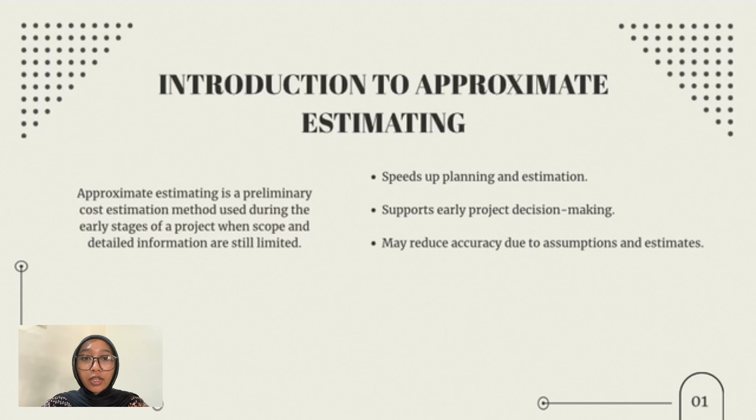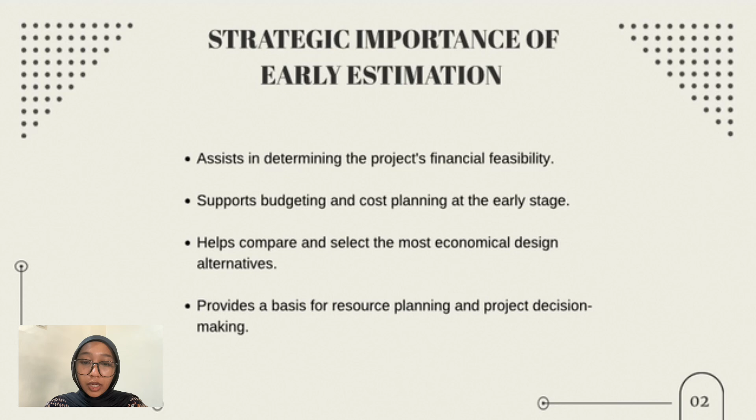So now I will move to the primary methods of approximate estimating. We have 4 methods that can be used. First is floor area method, where the cost is total floor area times cost per meter square. Second is cubic method, where cost equals building volume times cost per meter cube. Third is storey enclosure method, where cost equals enclosure area times weighted cost rate. And lastly, unit method, where cost equals number of units times cost per unit.

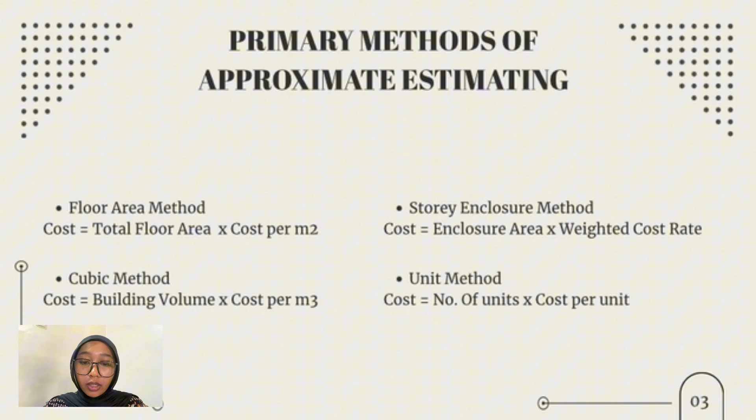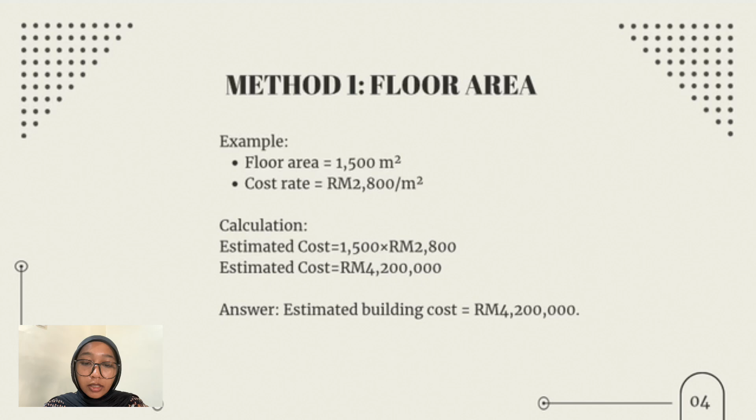Method 1 is floor area, where in the example the floor area is 1,500 meter square and the cost rate is 2,800 ringgit per meter square. So for the calculation, estimated cost equals 1,500 times 2,800 ringgit. And the estimated cost would be 4,200,000 ringgit. That is the answer for the estimated building cost from the floor area method.

So, the second method is cubic. For the example, the length is 20 meter, the width is 15 meter, the height is 12 meter, and the cost rate is 900 ringgit per meter cube. Step 1, calculate building volume. Volume equals 20 times 15 times 12 equals 3,600 meter cube. Step 2, calculate estimated cost. Estimated cost equals 3,600 times 900 ringgit. So the final answer for the estimated building cost is 3,240,000 ringgit.

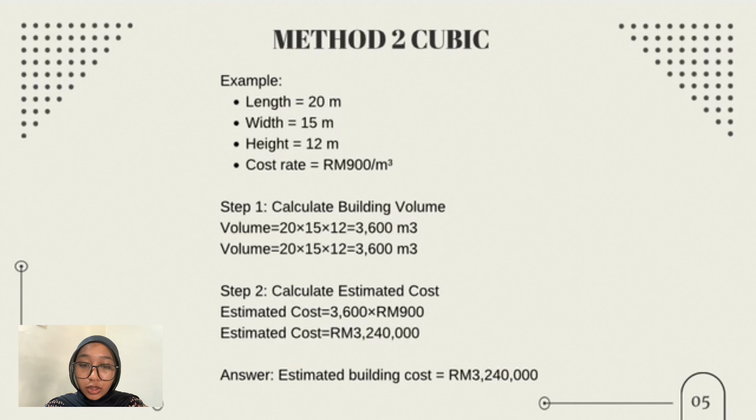The third method is storey enclosure, where in the example the storey enclosure is 5,000 units. Cost rate is 650 ringgit per unit. The calculation would be estimated cost equals 5,000 times 650 ringgit, and the final answer for the estimated building cost would be 3,250,000 ringgit.

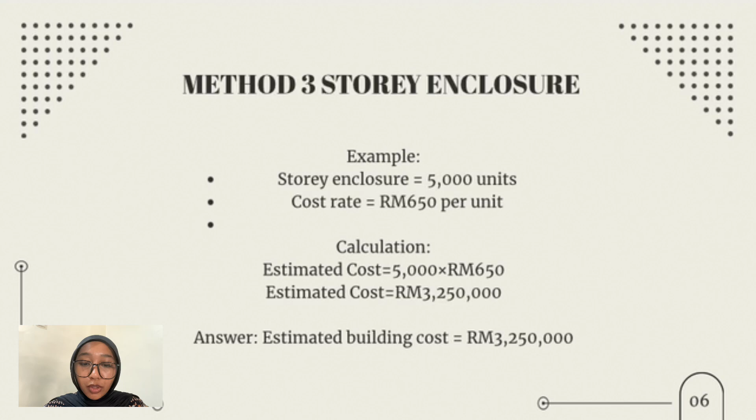And the last method is unit. The example given was number of units equals 120 hospital beds. Cost per unit equals 180,000 ringgit per bed. The calculation would be estimated cost equals 120 times 180,000 ringgit. Estimated cost equals 21,600,000 ringgit.

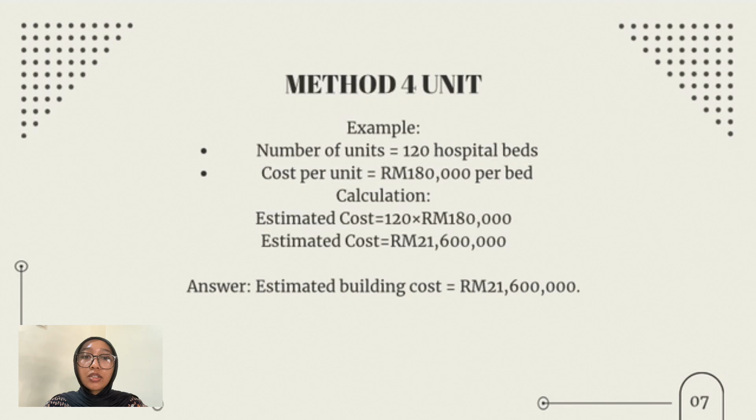Although approximate estimates are useful, their reliability depends on several important factors. The first factor is the accuracy of project information. The quality of an estimate depends on the information available. If project requirements, scope, dimensions, or specifications are incomplete or inaccurate, the estimate may differ significantly from the final project cost. Therefore, more complete and accurate information generally leads to a more reliable estimate.

Second, changes in material, labor, and equipment prices. Construction costs are constantly affected by inflation, market demand, supply shortage, fuel prices, and economic conditions. If the prices of materials, labor, or equipment increase after the estimate has been prepared, the final project cost may be much higher than originally estimated. And lastly, project complexity and site conditions. Projects with complex designs, advanced technologies, or difficult construction methods are generally more difficult to estimate accurately. These uncertainties reduce the accuracy of approximate estimates.

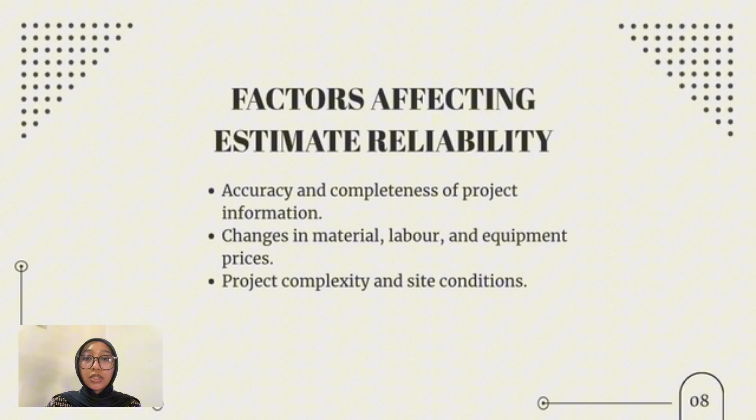So, in conclusion, approximate estimating is an essential tool used during the early stages of a project to predict construction costs before detailed information is available. It plays a strategic role by determining the project's financial feasibility, supporting early budgeting and cost planning, comparing the most economical design alternative, and lastly, providing a basis for resource planning. However, its reliability depends on the accuracy of project information, changes in construction costs, and the complexity of the project and site conditions.